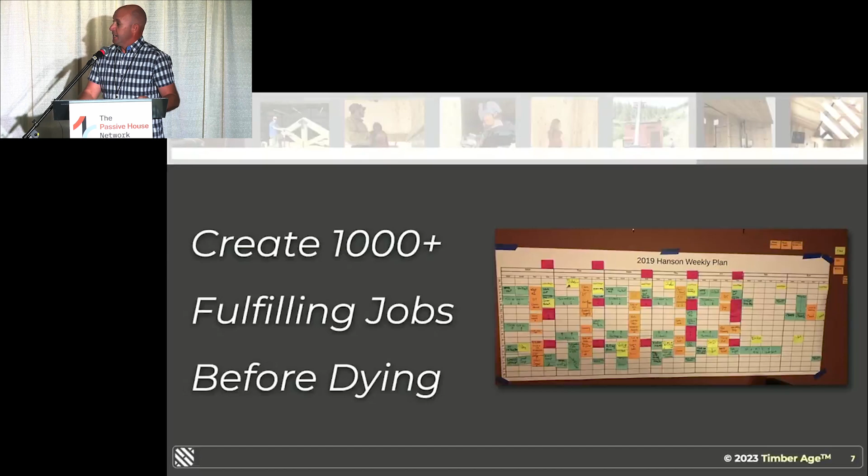In 2012, I moved to Durango, Colorado, and this is actually my garage right now because my mother-in-law just moved in with us, and we have all of her stuff in there. But it was a great picture to illustrate this.

When I first moved to Durango, people were asking me the strangest question, maybe you guys have experienced this before. The question was, 'Are you renting or did you buy?' I was like, what the hell question is that? Why are you asking me that? What they were saying, in not so many words, was, are you going to be here long enough for us to actually invest in a relationship and it be worth the time? And that is, Durango churns.

We've heard talk about it, a median house in Durango right now is $800,000. And for people that are teaching and are public servants, the churn is even worse. My kids are 3 years apart in school. Rarely do they get to have the same teacher in the same grade because they just don't stick. And this idea of sticking is super connected to fulfilling jobs. Our ability to help people stick is all about housing.

I can't not think about the environment. I'm just kind of wired that way. So I love the outdoors, and I've spent a lot of time with the Forest Service as part of starting all of this. Where I live, it was not totally apparent when I moved, but it's become more and more apparent that the way that we've taken care of forests has failed us. It's failed the next generation. And so now we have these forests that need attention. And where we're at, it's not if the trees are going to die or burn, it's just when.

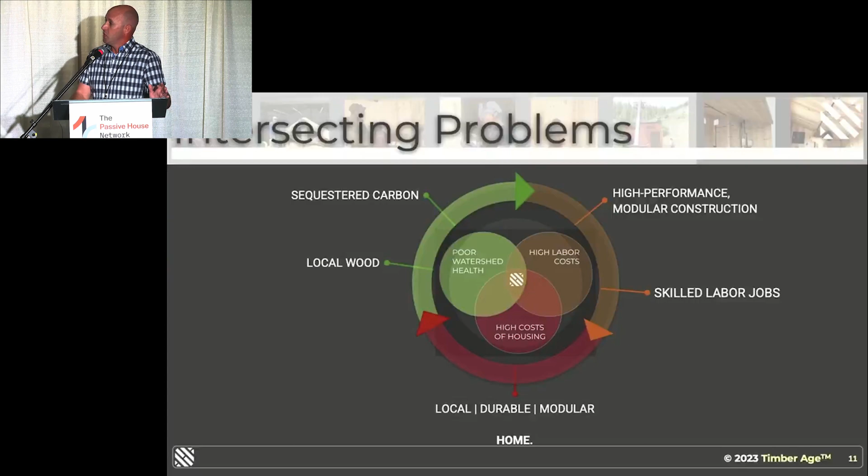So our mission is elevating communities through innovative materials and methods which transform the way we design and build. It's all about CLT and Passive House. Now, what's important is that we have to rally around problems that everyone thinks is worth solving, and then we have to be willing to take the best tools that we have to do that. Healthier communities, new ways of building, stemming from our best ideas about the materials and methods at play. So you just got the big philosophical introduction, and Chris is going to talk to you about what this looks like in practice.

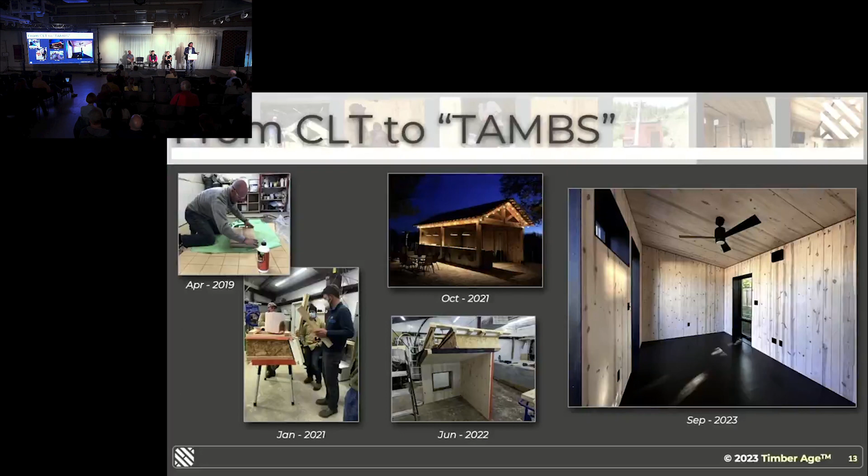Why CLT? We can use local ponderosa pine. Why modular buildings and passive house? Because we want safe, efficient, comfortable, and long-lasting use. We are here not because passive house is our mission, but it is essential to our mission. Our existence has only been possible through the extensive local, state, and national collaborative efforts with experts in forest management, forest science, wood science, building science, and business development.

These collaboratives allowed us to develop a value chain which serves the watershed and to build prototypes validating our manufacturing system. In early 2023, we rolled out the next phase of Timber Age, the Timber Age Modular Building System, or TAMBS, as we like to call it.

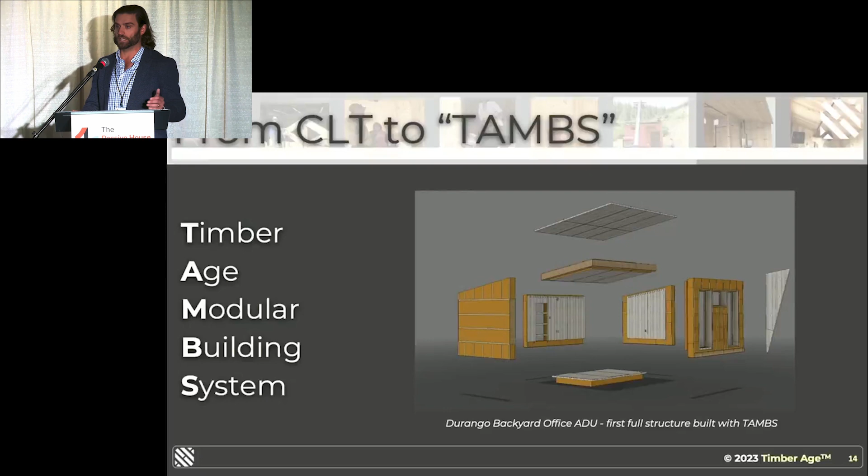So most of us here are building science geeks, at least we're aspiring to be. We have to consider the efficiency of the design and the operational carbon of our buildings. But too much focus on assembly performance prevents a balanced consideration of the total impact of a structure on the environment. And that total impact is super easy to measure, right? No, unfortunately it's not super easy to measure, but we have to try.

So one of the more tangible ways that we've chosen to consider this tough idea is to focus on miles traveled per pound. If I can produce structural wood, which is a pretty heavy component, from only 15 miles away, isn't that a little bit better than 1,500 miles away? While we understand the embodied carbon discussion is far more nuanced, and I think Chris can help us out with that a little bit more, I think we can all at least agree we need to start with metrics that are easy to measure. But regardless of the metrics, we need to use both lenses to achieve the greatest impact in the shortest period of time.

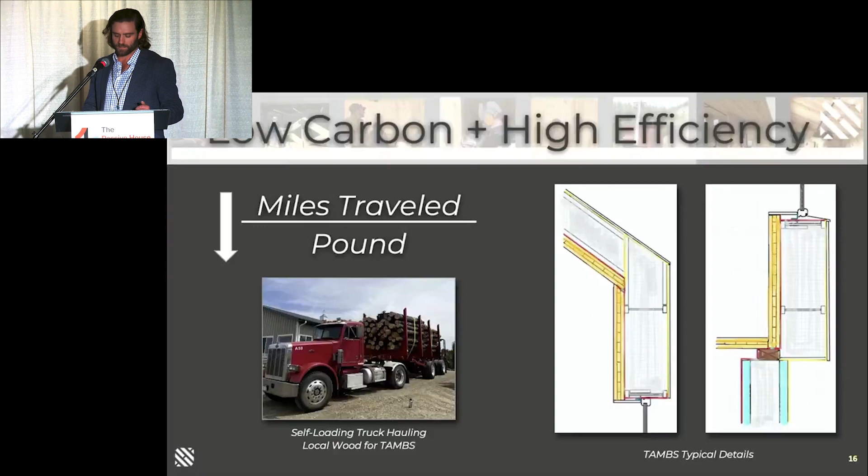So a big part of why I'm here today comes from working with Passive House at scale in New York City for many years with Steven Winter Associates. Modeling the performance of large buildings is critical to facing the climate crisis, but as I'm sure many of you know, the number of variables in the data can be overwhelming. The timeline and the carbon intensive materials can be very daunting.

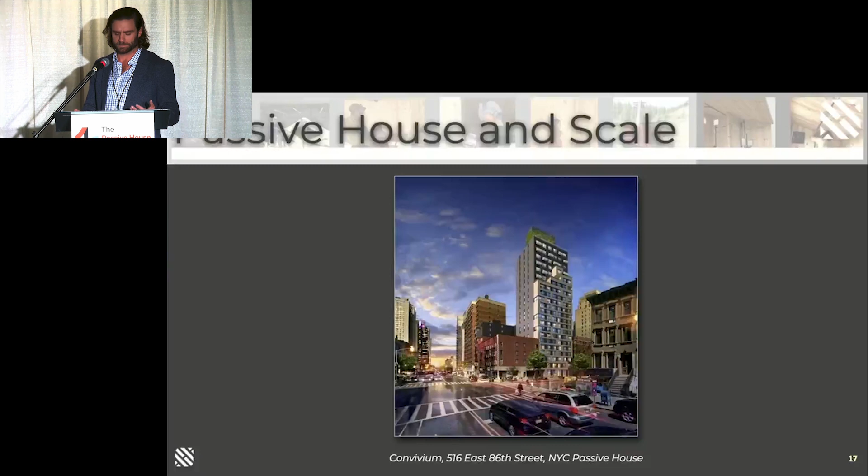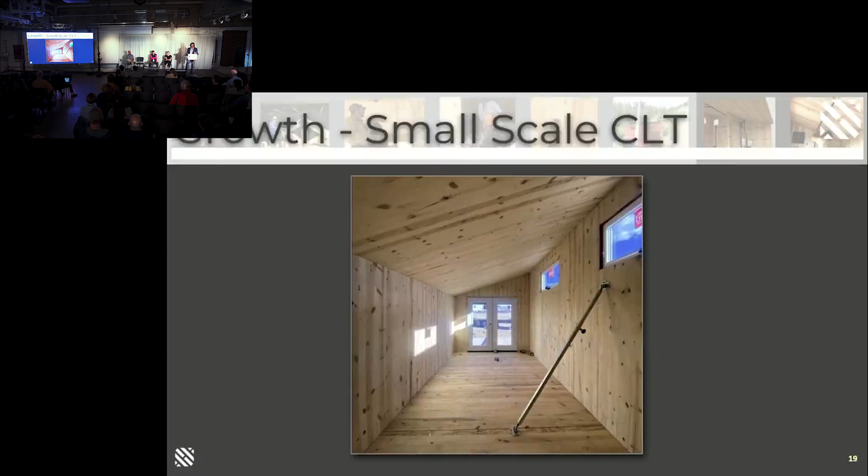It left me searching for more control over the process. I began to wonder, how can we build housing quickly enough to keep up with a growing population and do it with a laser focus on energy efficiency and embodied carbon? But also, how can we get people excited and educated about passive house and low carbon construction as fast as possible? Obviously, there's no silver bullet, but after a few months of searching, I came to the realization that CLT, and in particular small scale CLT production, has the incredibly unique ability to approach these problems and bring together a few of the things that I was already very passionate about.

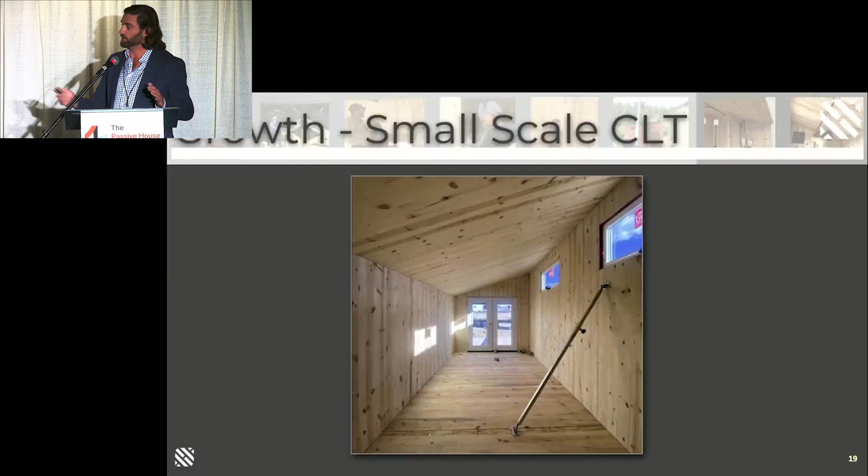This relationship is incredibly exciting to me. But after years of trying to sell and educate about passive house, I've learned that it's time to bring in the big guns if we're really going to move. And nothing sells better than Instagram.

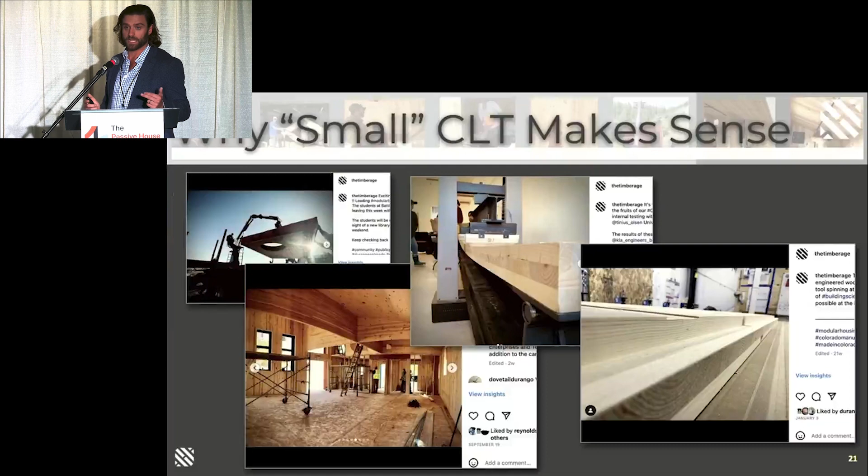CLT just looks and feels good. We now understand the health benefits of biophilic materials in our living and workspaces. And when that material has a cool story, is fun to work with and design with, and makes you feel good, that is something that people can really get excited about.

So what do I mean by easy to manufacture? Developing a manufacturing process around CLT is incredibly efficient. Our shop drawings dictate how our assemblies go together, but our CNC transfers the majority of our instructions right onto our 5-foot by 10-foot CLT panels.

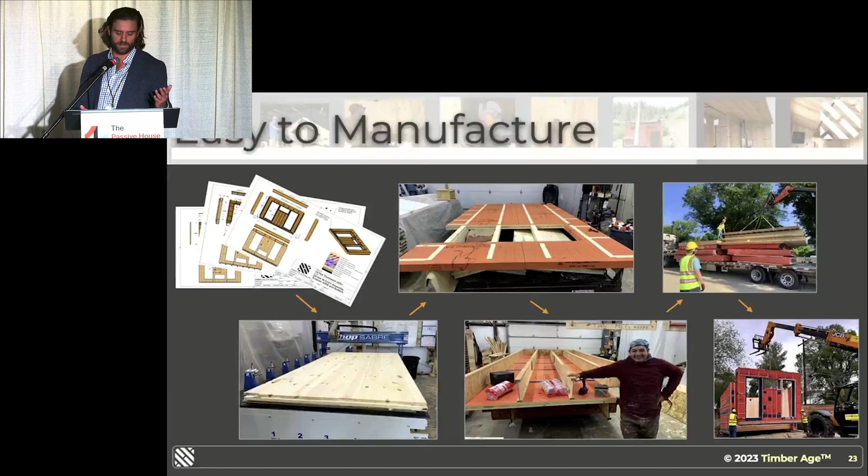All of our insulated wall, roof, and floor assemblies get built in a similar way. A vapor open air barrier is adhered to the CLT, and wooden I-joists connect the individual panels together. This cavity then gets wrapped with our vapor open weather barrier and filled with 12 inches of dense pack cellulose to achieve about R52. With this level of control and pre-planning, projects get installed and weather sealed in days instead of months, and the efficiency is built into the system and is preserved.

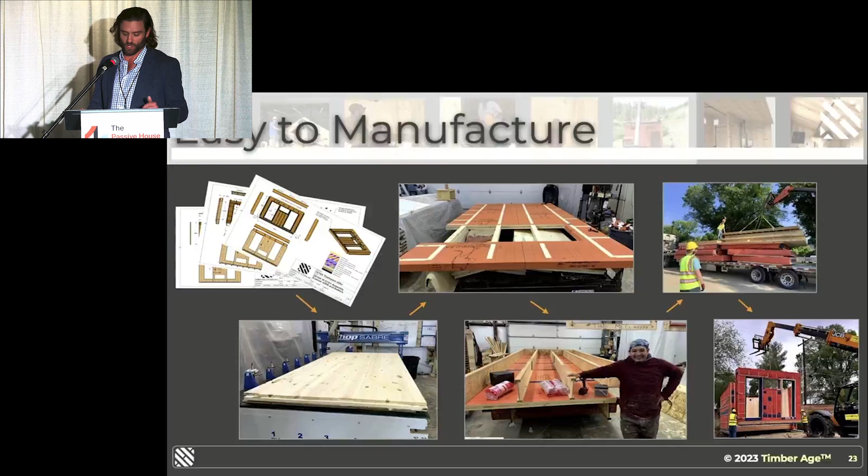Now there is no wonder why so many designers have chosen to combine CLT construction and passive house, even those who aren't just completely obsessed with whatever the Europeans are doing. Having a continuous thick structure creates a very effective substrate for applying an air barrier and provides an uninterrupted structure for attaching insulation with minimal thermal bridging.

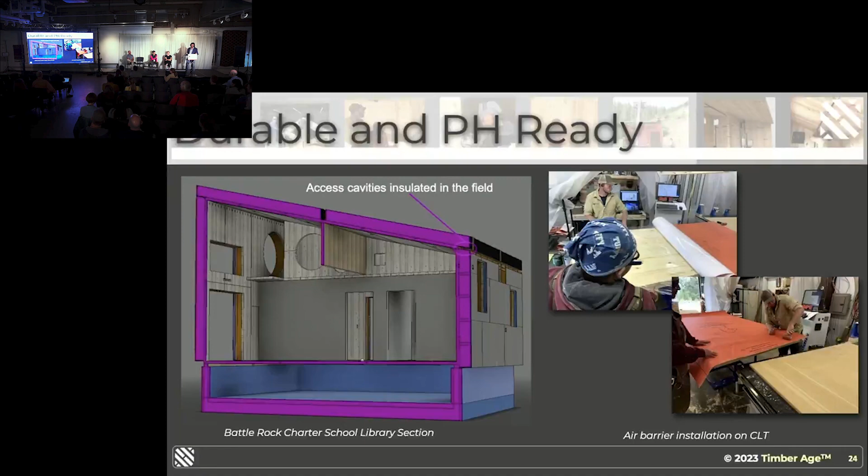But on top of all of that, the ability to utilize wood that would otherwise have gone up in smoke, and still touch and feel this beautiful material for the life of the building, is hard to beat.

This building we recently installed will be the library for students of the Battle Rock Charter School near Durango. The whole building went together in 3 days, with windows installed and weather sealed. Barely any trash was produced. And the only stressful feeling we had was that we may have had too many people on site.

We also know that our system lends itself to the growing interest in small backyard ADUs. This backyard office was recently completed in Durango after making a quick trip to Washington, D.C.

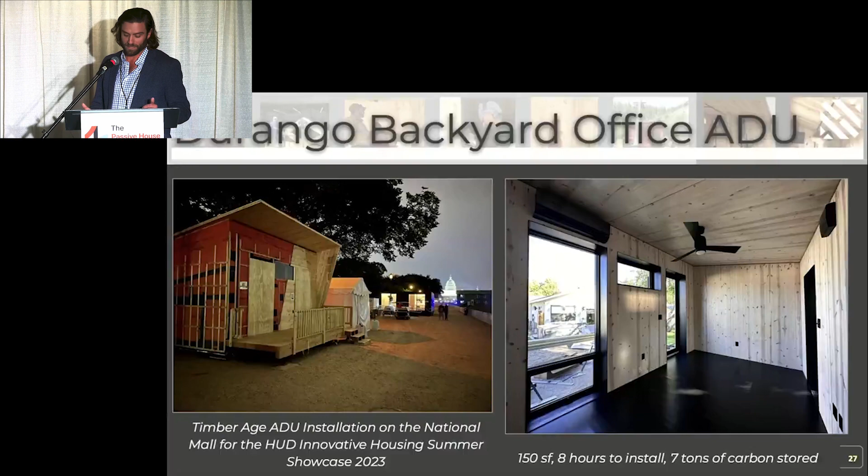for the Innovative Housing Showcase put on by HUD, Housing and Urban Development, thanks to funding from the U.S. Forest Service, where we were able to share our story with our representatives in Congress as well as the general public. Next month, we will be building our first certified passive house, the Hemlock House, that's going to

New York. This will also be our first single-family home, but will serve as a model for a simplified structure that could easily be built upon to create multifamily housing.

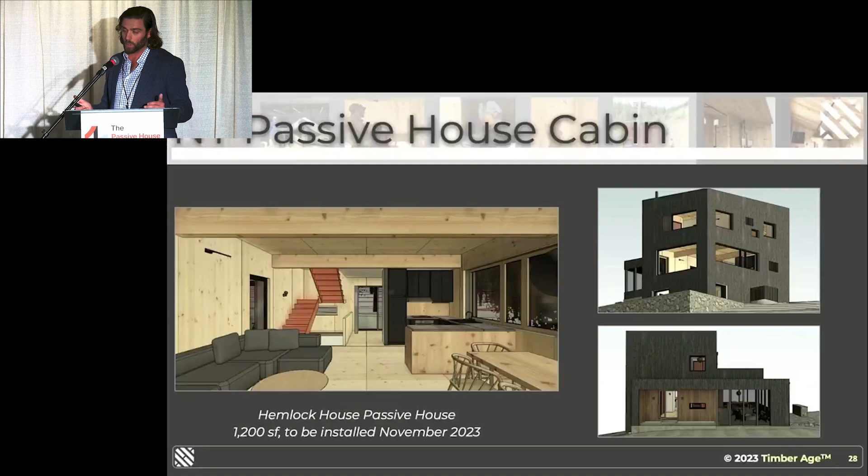But as we keep mentioning, our ultimate mission is to create affordable housing, which is a great need in both rural and urban areas, as Kyle has discussed.

We recently developed the Linear House. It's a fully designed, affordable model priced at $300,000, meant to house a family of 4.

Right now, we are working on getting this to be the basis for a 50-unit affordable development nearby Durango in the coming years. But our hope is that it could also be a repeatable, replicable design sent to rural communities around the country. So with that, how do we see Timber Age growing beyond Southwest Colorado in Durango?

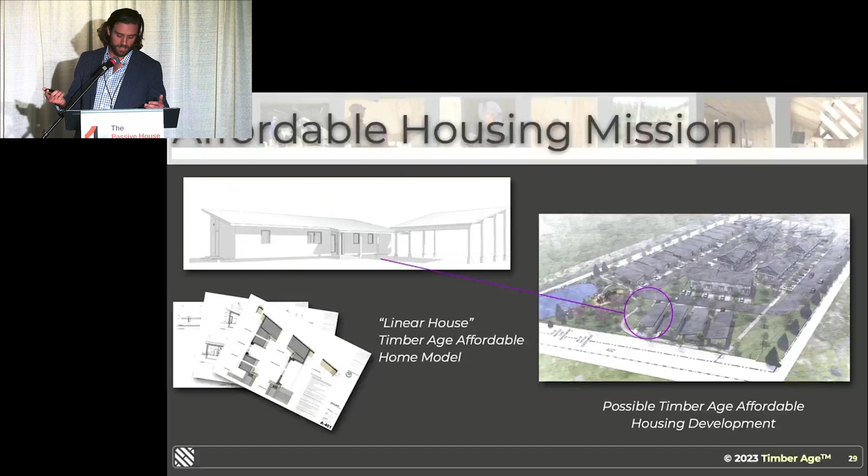What is great about our mission that Kyle described is that it gives us some pretty clear direction. So first, our typical plant design is about 5,000 square feet, and it is small enough to go pretty much anywhere. It also needs relatively simple machinery, requiring only about $1.5 to $2 million to get off the ground.

As far as where to go, we are guided first by the 32 million acres that the U.S. Forest Service has identified as high-risk fire sheds that will need to be thinned over the next 10 years. They have no idea what they're going to do with all this wood that has to be cut down for us to help deal with this wildfire crisis, which is why they're so invested in what we're doing.

For these areas, it is not a matter of if, but when they will burn. And if we don't thin them now and come up with creative ideas to store all that carbon, we are just going to keep digging a deeper hole.

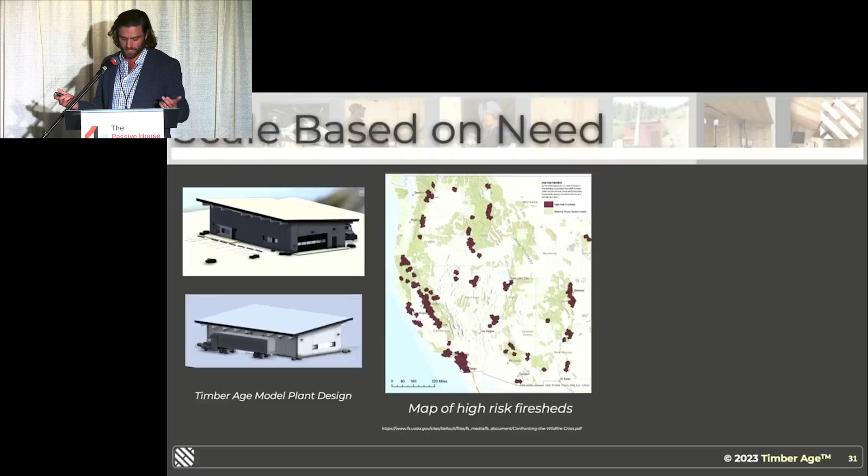And then finally, we are looking to see where this intersects with distressed communities in the United States. Turns out there's a decent amount of overlap, especially when you consider the collapse of local timber industries over the past century.

So with that, we believe that this is a problem worth working on, but to create something big, we must start small. And it starts with people.

In order to move quickly, we have to learn fast, because we don't have decades to keep making mistakes. We have years. This is why we want to keep things small, remain local, reduce risk, learn quickly, and grow intentionally. So hopefully one day our impact can be great.

And something Chris was just saying earlier before the presentation was, it's not about scalability, it's about replicability. And that's something that, when he said that, I was like, man, got to write that down.

But to also steal another thing from Chris, from his book, Build Beyond Zero, I just wanted to end with this quote: Any intelligent fool can make things bigger, more complex, and more violent. It takes a touch of genius, and a lot of courage, to move in the opposite direction. Thank you.

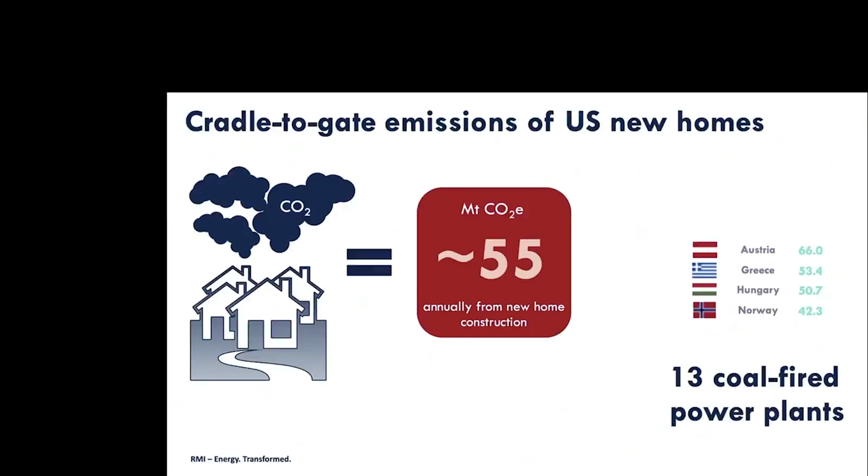And there's some weird animations. So I have been able to do some studies using the BEAM tool that Lindsay alluded to. Our team has done several studies.

There are, I guess, 4 studies here that I'm going to summarize, where we were able to take as-built plans for low-rise residential buildings in Canada and the US. These are actually buildings that have been built, so we know we're getting a pretty good snapshot of what's out there. In total, it's representing about 800 or 900 homes now—not a huge cross section, but enough to feel like we have some idea of what's going on.

Between those studies, we did one for the city of Vancouver, one for Nelson and Castlegar, also in British Columbia, one for the GTHA, the Greater Toronto and Hamilton area, and then one for a large developer who builds in Florida and South Carolina.

At a high level, the results showed that at the high end of the embodied carbon for those buildings we looked at, we got anything from 235 kilograms of emissions per square meter of conditioned floor area up to 561. If you start multiplying those numbers out across all of the square footage built in North America, it's pretty huge.

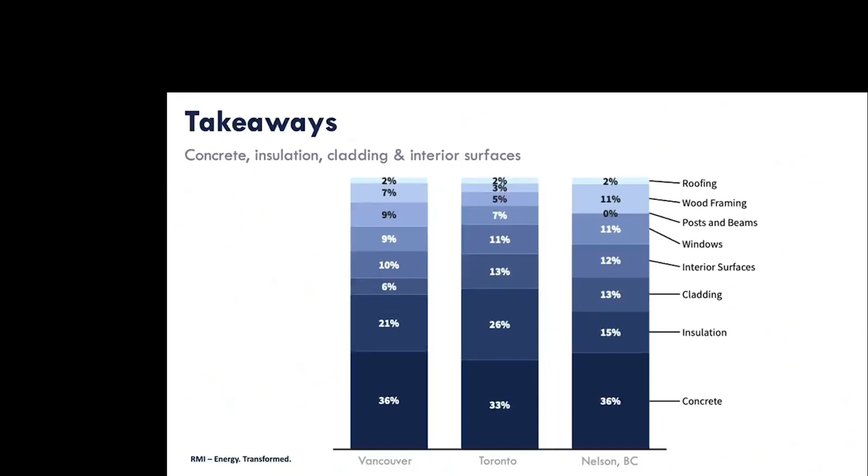Some terminology things I wanted to show, because I think thinking about emissions from materials is new, and you can think about it in a bunch of different ways, and I wanted to run through those with you. One is to just add up the emissions for all the materials in any given building, and there's just a net answer, usually expressed in tons of carbon dioxide equivalent.

That's great for what I did in that first slide—saying all the homes together add up to this many tons or millions of tons of emissions. It's great for governments to start getting an idea of what their new housing stock is going to be responsible for. Building companies are going to use that kind of whole-building number for their ESG reports. But it's sort of like saying you can state how much energy a building uses, but a big building might use a lot more energy than a small building. So we can also look at intensities with embodied carbon emissions.

One way of doing it is looking at net emissions by conditioned floor area. So those are the results I gave you from the studies, in kilograms of CO2e per meter squared of conditioned floor area. That helps us normalize for the size of the building, helps give some benchmarks and targets to aim for, regardless of the size of your building. And it does it in a way that prioritizes living space.

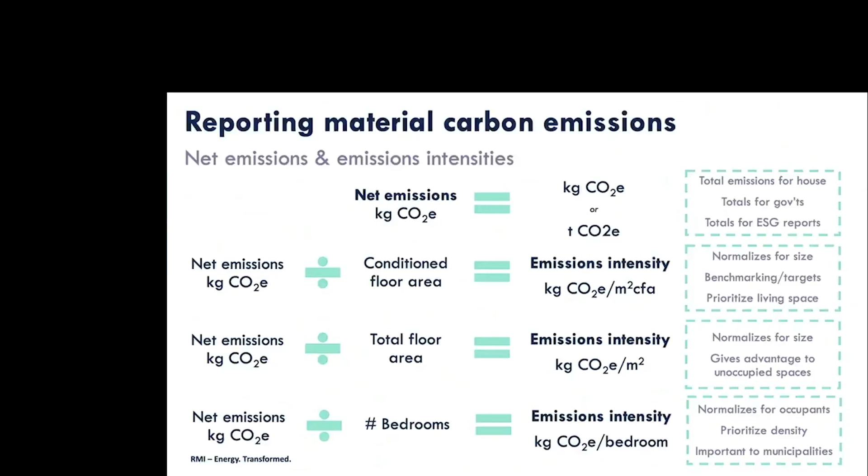Lindsay mentioned that I was part of the team that developed this BEAM tool, which is an estimating spreadsheet. It's free, and it allows you to make a pretty quick, easy, and straightforward model of a building. This is the tool that's behind all of those studies. I'm not going to talk much about it, but I'd encourage you to go access it and play around with it.

I also want to be clear that in those studies, we weren't tackling all the embodied carbon emissions in a building. We were tackling a bunch of them, but not all of them. What's included in those numbers I've been showing you is basically the structure, enclosure, and partition materials, everything highlighted in green on the left. But we did not include some pretty big categories like mechanical, electrical, and plumbing materials, fixtures, appliances, surface finishes, all kinds of things that would actually be adding to those totals. So when I say a typical building is maybe 200 kilograms of emissions, that's 200 for the stuff on the left. It's not including the stuff on the right.

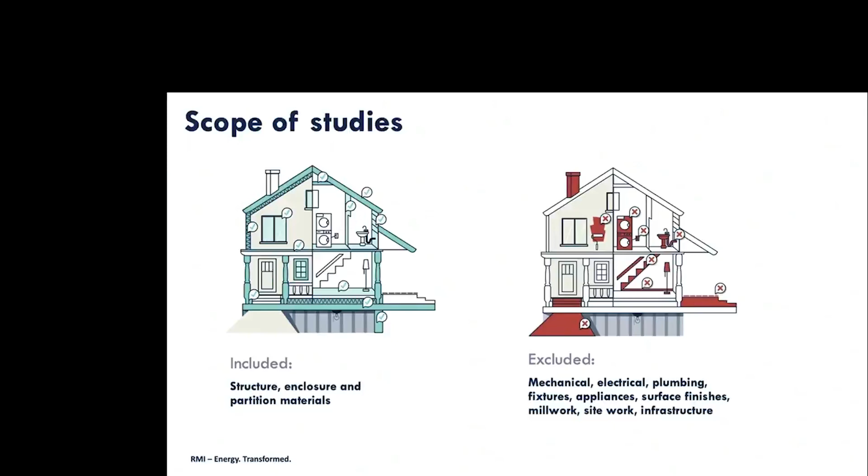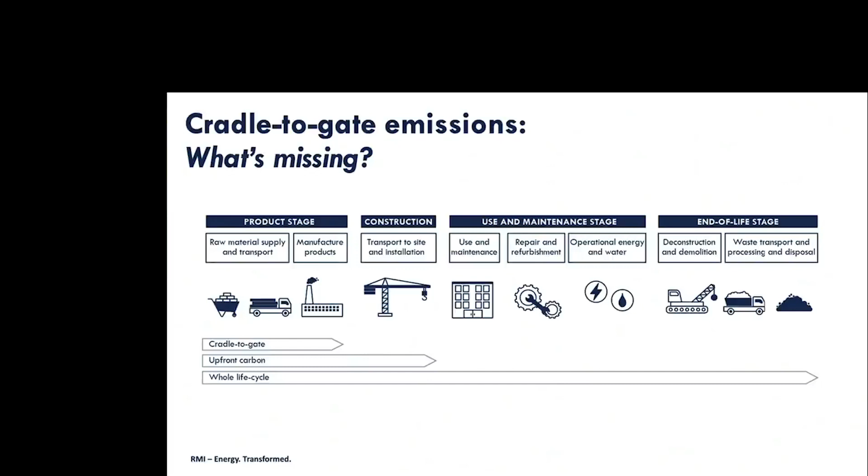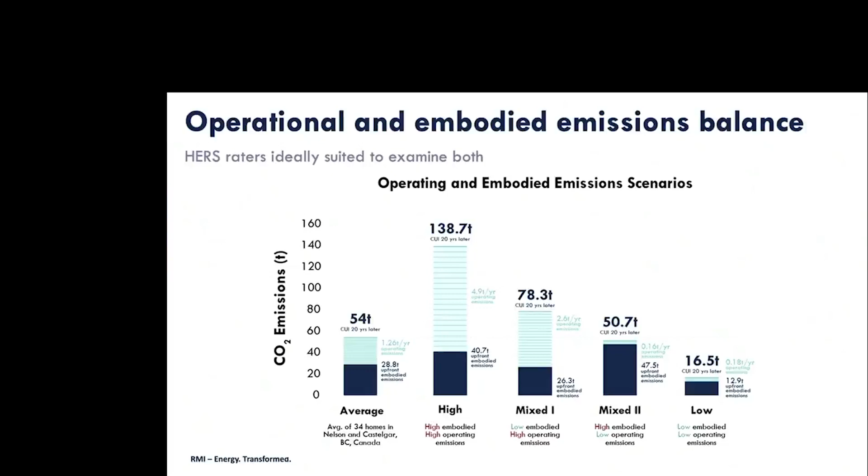On the far right, where you get both of these things right, where you can reduce both, that's where we want to go. I think it feels like one of the next steps in the practice of doing passive house is starting to add this dark blue bar onto your analysis, and make sure you're not knocking all the operating emissions off a house at the expense of a huge amount of embodied carbon. Really, we want both of those things as low as possible, and that's how we win.

We did a really interesting study for Doug Tarry Homes, a production building company in Ontario. I think they do about 500 homes a year, so they're not massive, but they're not tiny. It's a great example of the insight an embodied carbon analysis can bring to a builder.

We took one of their models and did the embodied carbon as they build it—they build several hundred of these a year—and you can see it was about 66 tons as built. Then we used the BEAM tool to iterate on that design. We changed nothing about the shape or size of the house; all of that stayed the same. But the first thing we did was identify for them that there's a bunch of insulation materials where they're using the highest embodied carbon version of that product. If you just switch to the lowest embodied carbon version, there's a 20% reduction on the table. So there's no difference in how you're assembling the house, even what material you're buying—that's like a procurement choice that could make a 20% reduction.

They then wanted to know, in the next 5 years, if we switched a whole bunch of products to the best things we could switch them to, where could we get to? That's the one we highlighted—we called it the one-to-one substitutions. You can see we got it down to just under 23 tons of emissions, a 65% reduction from today's as-built. Again, that's just straight product swapping—switching from mineral wool batts to cellulose, switching to a lower carbon concrete mix—nothing way out of the realm of possibility. Everything we tried for them in those one-to-one substitutions had cost parity and was available in their Ontario market. So very achievable—about a 65% reduction.

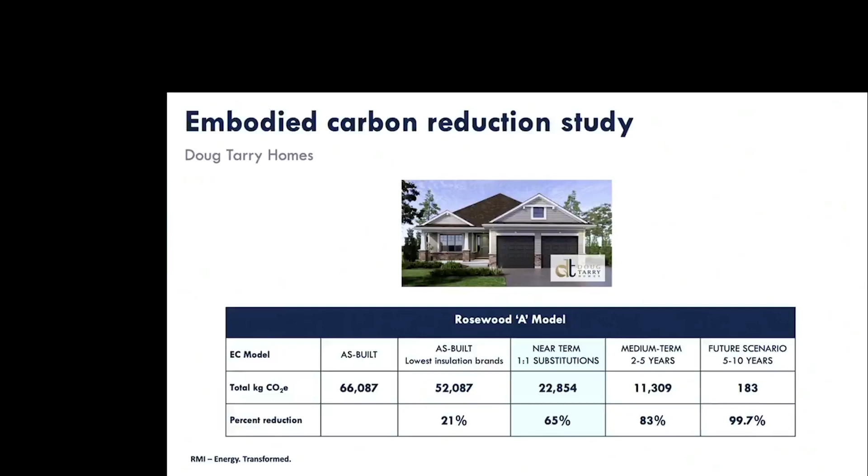Then, further into the future, we start suggesting things where the products are less available or maybe don't have their code compliance lined up yet, plus a few small design changes. But the point is that within 10 years they could actually have a zero embodied carbon home—and they were already the first Ontario production builder doing all net zero homes. So they could get to that level on embodied carbon with some foresight and planning.

For those of you in the business of helping inform builders on how they can decarbonize, I feel like the embodied carbon thing still kind of freaks people out. They're like, oh, I don't know what to do, I don't know what products to use, it all feels really overwhelming. My strategy, which is what we did with Doug Tarry and other developers we're working with, is: just find one thing a year that you can reduce.

We still have, well it's one year less since I made this slide, but 6 or 7 years before 2030. If you want a 40% reduction by 2030, you're only looking for a 5% reduction in your embodied carbon every year, and that's really achievable. Talk to your concrete supplier—you could knock 5% off your total embodied carbon emissions by speccing a better concrete. Look for a better insulation, find the best-in-category drywall product. I'm not trying to make that list a prescription, just pointing out these are really approachable changes, and nobody needs to find 40% at once. You can find it piece by piece over time and still make a really big difference.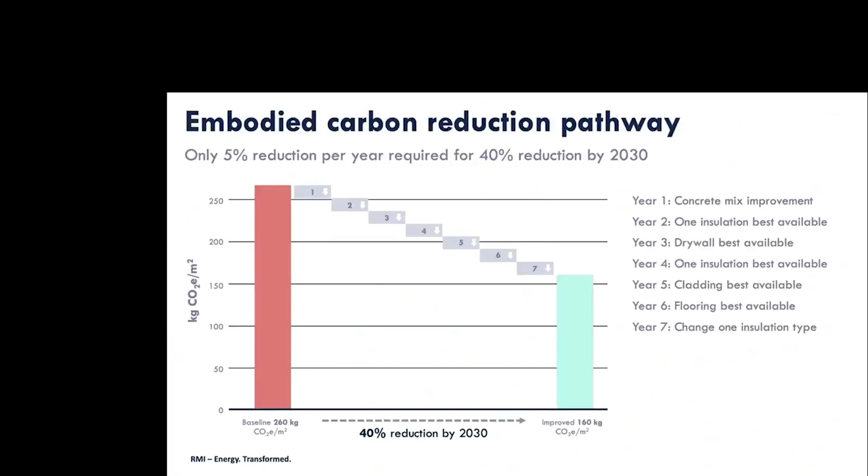I'm going to end with a couple quick case studies, happy to talk more about these with folks after. I chose these two because they're both passive house buildings, so we know on the operating side they're both electric and passive house, doing as much as possible operationally, but these are projects getting really great results in terms of embodied carbon.

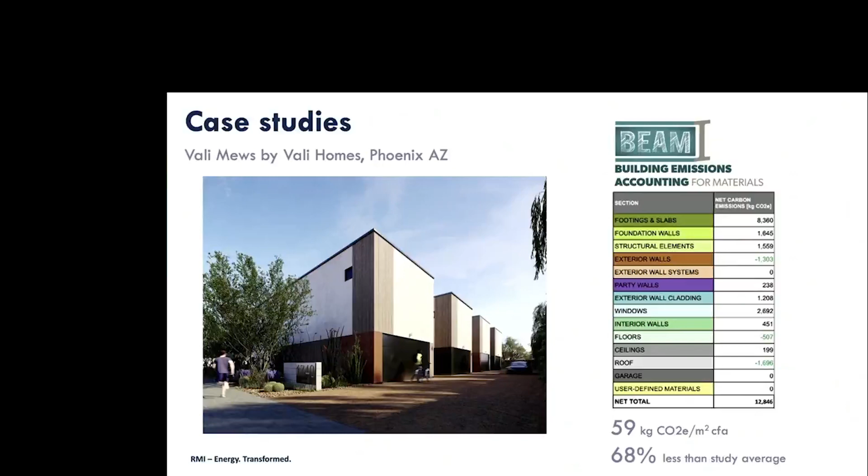This set of 4 homes in Phoenix by Vali Homes had embodied carbon of 59 kilograms of CO2 per square meter. 200 is an average in North America, and the best result we saw in all our studies was 72. So 59 is really exceptional.

And New Frameworks, similarly a passive house, had this house at about 31 kilograms of emissions. So there's lots that's possible, lots that's feasible, lots that people are putting into practice right now to get huge reductions in embodied carbon.

The embodied carbon space right now is where passive house was 20 years ago, with most of the industry saying you can't drop it by 80%, and everybody in passive house saying, yeah, you sure can. And everybody saying, oh, but it's going to cost more, it's going to... all the stuff. I'm hearing exactly that same conversation now around embodied carbon, and I'm saying here's somebody getting an 80% reduction, doing it affordably, meeting code, all of that. The arguments are pretty cyclical, but I feel embodied carbon now is sort of where passive house was maybe 20 years ago.

If we were able to get to the level that Vali Homes and New Frameworks are doing, we're talking about moving that total number for the US from 55 million tons down to about 13 million tons. That's like shutting down 100 gas-fired power plants. That's no small impact on the national emissions picture.

It's pretty big, and I think it's well within the wheelhouse of anybody who's been in passive house, who's into numbers, into measuring, into figuring out how to optimize. I feel like diving into embodied carbon would probably suit your personality type, and there's a lot on the table right now in terms of what we can do for the climate if you dive in and do that.

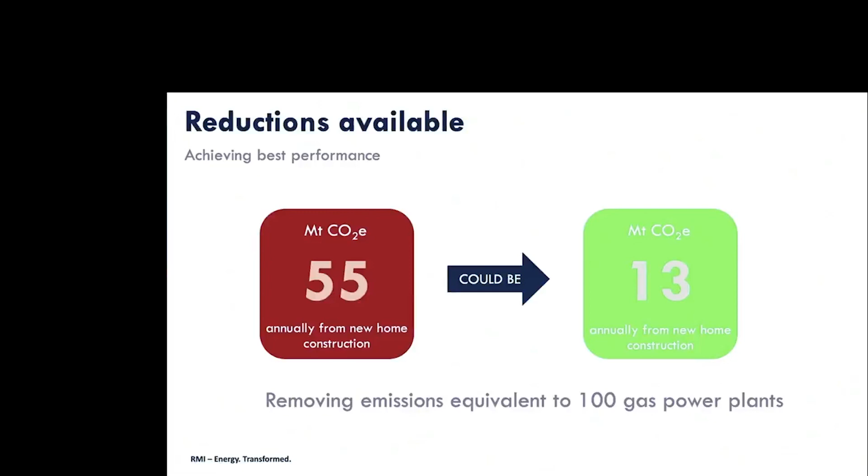I'll end by saying the project I'm working on right now is with RESNET, and we are coming up with an ANSI standard for measuring embodied carbon specifically in homes, in a way that works for energy raters. In the home building market, whether you're doing passive house, HERS ratings, or using HOT 2000 up in Canada, energy modelers are making exactly the kind of model you need to do an embodied carbon study. There's not much more information you'd need to put into that model to get really good embodied carbon numbers out.

What we're trying to do is get a standard out there quickly so that no matter what way you're looking at the energy modeling of a building, the approach to embodied carbon works in that workflow, but is also the same across all the different energy rating systems. If you want to dig into any of the studies that informed this work, there's a bunch of studies and references you can get into in more detail. But I think that's what I've got for you.

Should I just use this microphone? Oh, that one, okay. How about now? Great, thank you. Thanks so much, you guys.